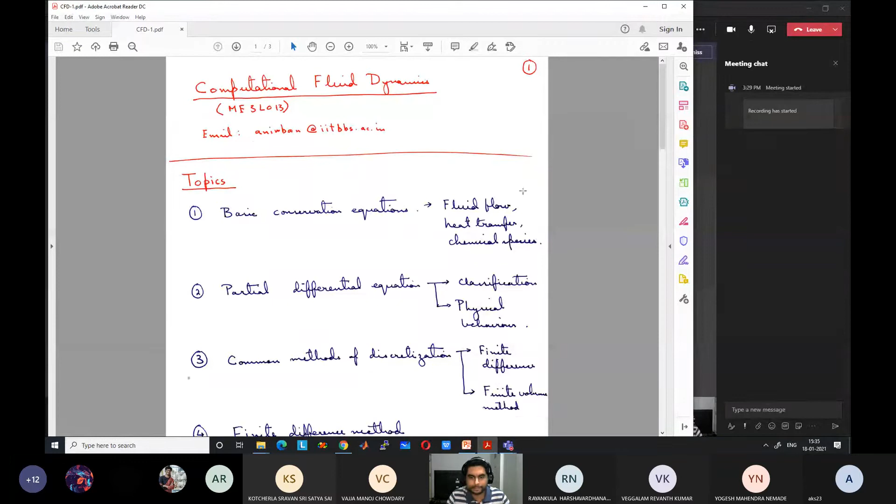So again, like our power plant engineering class, because this is a 2 hour class today, initially we will just go through the topics that we are going to cover and what are the importance of these topics. And then in the second part, after a short break, we will start discussing some of the basic things in CFD, why CFD is required, why it is important, what basically is CFD. Many of you may not be very clear about that also. What exactly is CFD, why it is required, things like that.

And from the next class onward or next to next class onward, we will dive deeper into the methods and problems and mathematics of it. Okay.

So you will see that CFD is a very important topic in your subsequent career, depending on which area. If you remain in core area, it will be a very important topic, particularly for students who are going to pursue masters, dual degree students, or those going to pursue higher studies in foreign universities. Also for students who are going to go to jobs in core areas, CFD is very important. Okay.

And CFD basically encompasses solution of thermal and flow problems using computational methods, as we will see later today. Just let me switch on. Okay. So using computational methods, how to solve thermal and fluid flow problems. And we will see that thermal and fluid flow problems are coupled together. They cannot be separated directly. The temperature influences the flow field and the flow field influences the temperature evolution. So they are solved together and together are part of CFD.

So even from job perspective, particularly for dual degree students, it is very, very important, because most of the companies in India in core areas do modeling and simulation work. They don't have the resources for doing large scale experimental work. The large scale experimental work is done in foreign countries, and the modeling and simulation work is transferred to India, and Indian organizations, or the Indian branches of the multinational companies, have very good research talent and facilities for doing CFD related work. So CFD is a very important course in that respect.

So it is good that you have selected this area, particularly if you want to go for core jobs or for higher studies. Okay. So let me first go through the topics, and then we will come into the details of CFD. What is CFD, and what is the importance of CFD?

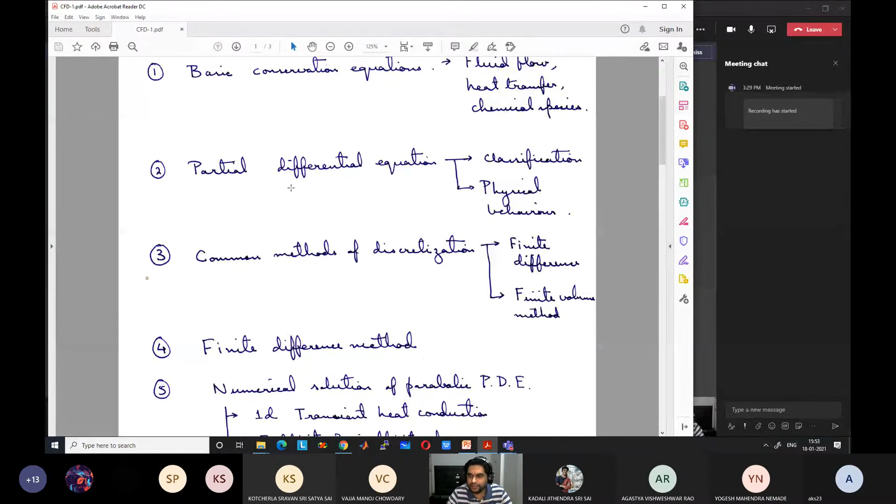So if you have a set of algebraic equations, say 100 algebraic equations and 100 unknown variables, how to solve them? With 3 equations and 3 unknown variables, you can just solve it manually. But if there are 100 equations and 100 unknowns, you need some kind of matrix inversion or some other method, and that is what we are going to learn.

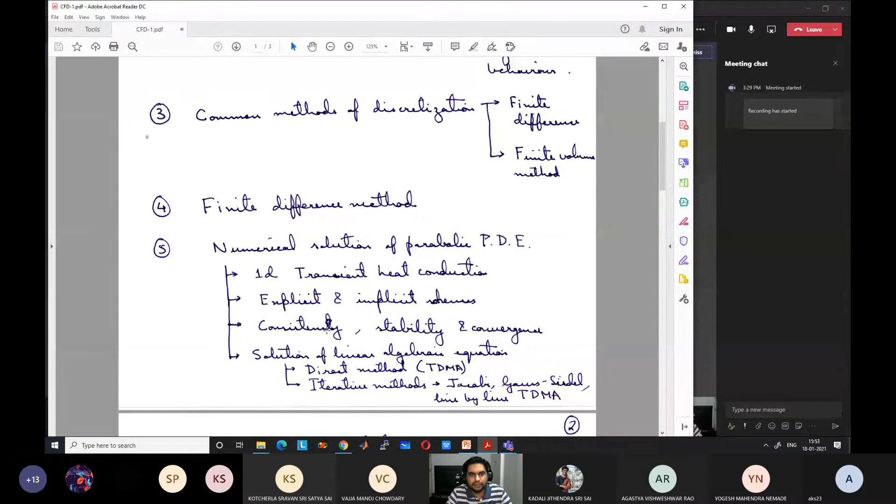There are two types of solution technique. One is known as the direct method, where you can directly solve and directly get the results. The second type is known as iterative methods, where you go through iterations, solving the problem again and again so that finally you go towards a better and better solution, closer to the correct solution. There are some advantages of iterative methods. In many cases, direct methods cannot be used, so you have to go for iterative methods. We'll study the Jacobi method, the Gauss-Seidel method, and something known as line-by-line TDMA.

The rest of the course will be on the finite volume method, which is the most important method in CFD. We will study the 1D steady diffusion problem, then how to treat source terms, then 2D and 3D problems. After learning about diffusion, meaning conduction-type problems, we will go into convection-diffusion problems: how to capture the effect of fluid flow. There are different schemes for that. We will study the most important fundamental schemes: central difference, upwind, exponential, hybrid, and power law, and their advantages and disadvantages.

And finally, we will see how to solve the flow field. Solution of the flow field is actually quite difficult. It is not as easy as solving other equations, as we will see later. I can explain briefly here why it is difficult, but it will be more clear when we study flow fields. In general, whenever you solve an equation, the number of unknowns equals the number of equations in any problem. Otherwise, you cannot solve the equations correctly, right?

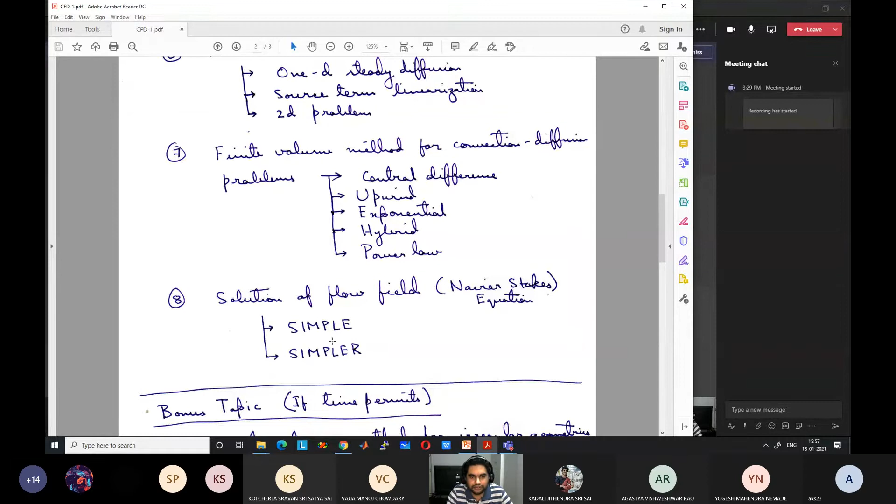Okay, so this is our syllabus. Generally, I have taken the course, this is the third time I am taking the course. I have tried to devote a few classes, 2-3 classes, on an additional topic which is not part of the curriculum, but is very important for the students who actually go into CFD solutions using some software like ANSYS, which is discretization in unstructured grids.

So for that, we would like to study what are structured and unstructured grids. Up to point 8, whatever we will discuss will be for regular grids. Regular means rectangular grid, square grid, cubical in 3D, rectangular, cuboidal in 3D. But in real life, the grid can be very haphazard. It can form multiple triangles of various shapes and sizes, which are known as unstructured grids.

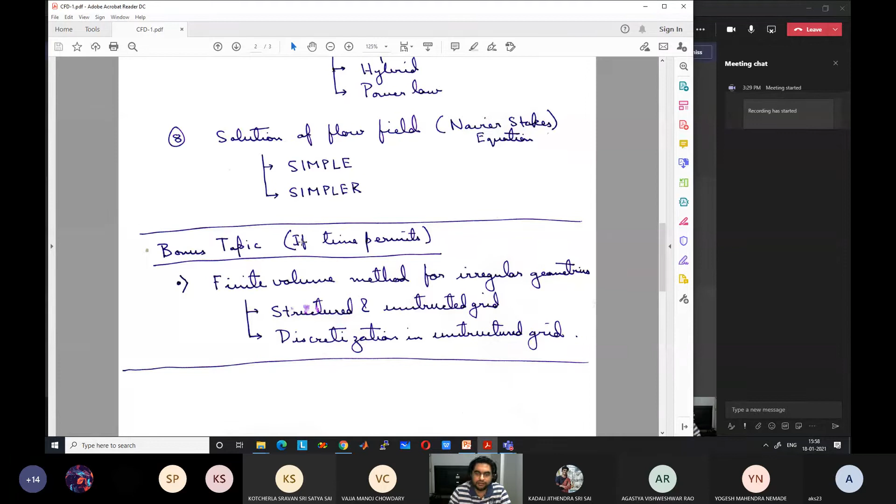So we will study the differences between structured and unstructured grids and how to discretize for unstructured grids. We will devote 2-3 classes if time permits. Not part of syllabus, but we would like to learn it because it is very important and it gives us an interesting insight into how the software programs run. Any questions up to this point?

No, sir. Where were we? Okay. Some other points.

So books for this course, I would suggest that you go with the class notes, because at least for the first part, we are not going to follow any book in a linear fashion. The notes are developed based on various resources for the first part. Once we go to the later 60% of the course, the book by Patankar, Numerical Heat Transfer and Fluid Flow, we are going to very closely follow.

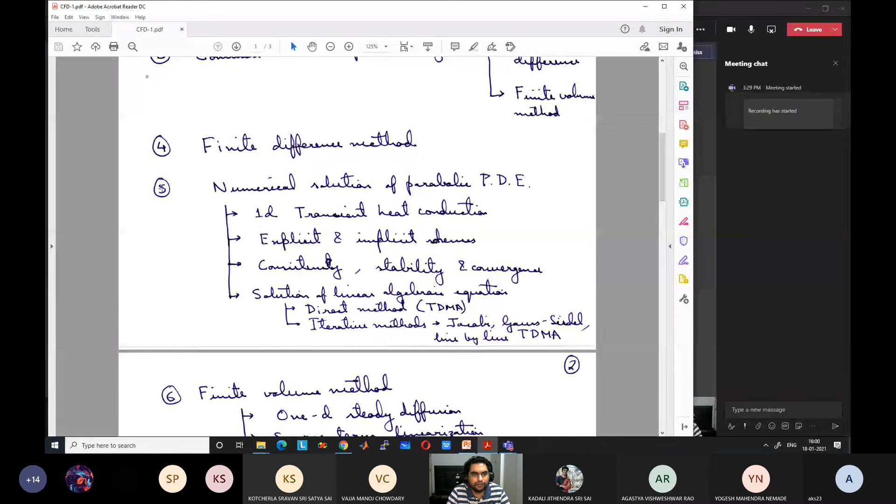Starting from point 4 or point 5, and from this point onwards, 6, 7, 8, we will very closely follow the Patankar book. Patankar actually is a very famous book. It was first written in 1980, and this scientist, his name is Suhas Patankar. He was actually a pioneer in this area.

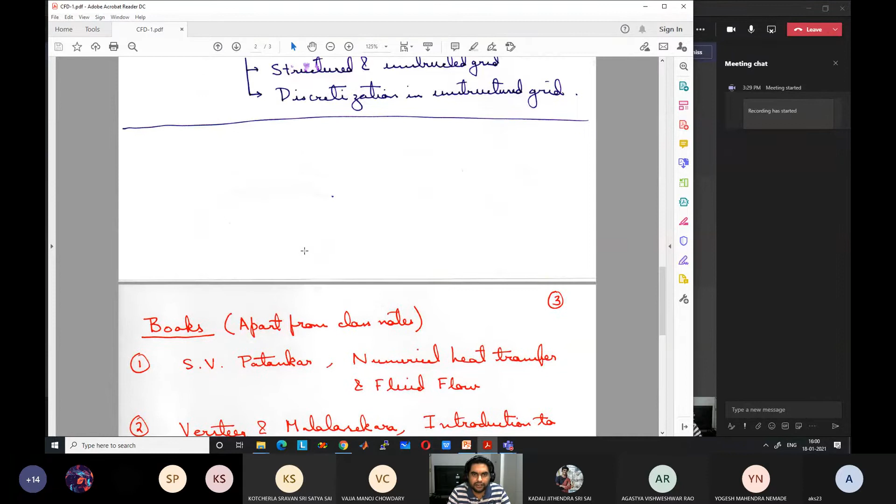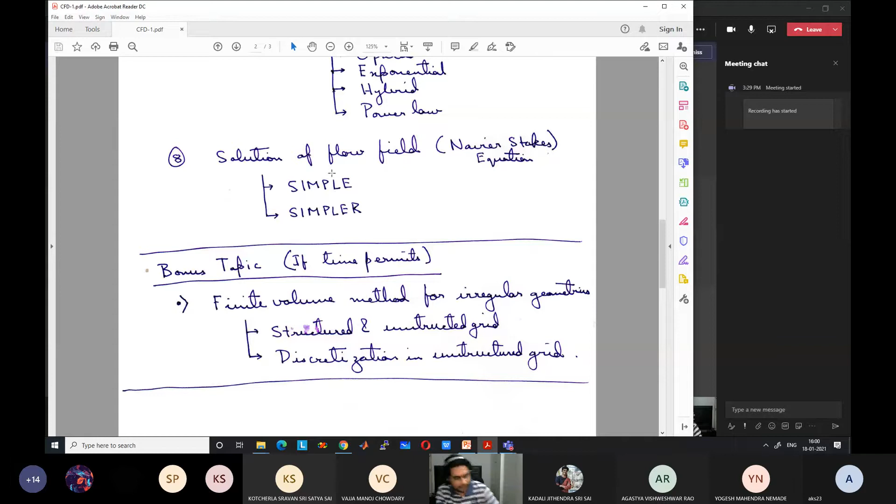He actually developed a lot of CFD algorithms during his PhD and later work in the 1970s. He along with his guide developed the solution of the flow field, the SIMPLE algorithm. All of them were invented by Suhas Patankar when he was doing his PhD in the US. So this is a very fundamental book. It is more like notes, a very short and small book, but it is quite costly. So you have to see how to get it. Otherwise, let me know.

The second book is a more recent book by Versteeg and Malalasekera, which is more exhaustive and covers more topics. For the second half of the course, you can also go through the Malalasekera book. It has more details, but all of them will not be covered in this course, since it's a very introductory course. But if you want, you can go through it. It is not very costly also.

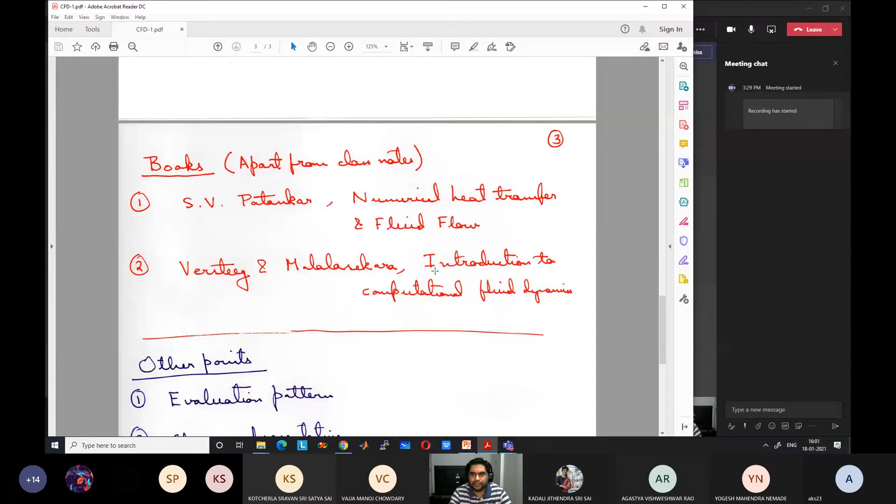So for CFD, remember that it's a very different type of course. It's not like your normal theoretical course. Although we are learning it here like a theoretical course, through lectures, CFD is not actually suited for this lecture-oriented teaching pattern. It is more like a practical course. So although we will go through a lot of theory, there are not many numerical problems that can be solved by hand or during the exam.

Some problems can be devised by me, or I can come up with some clever ideas for generating some small problems, but those are very limited. And getting good marks should not be your aim in this course. Anyway, all of my students generally get good marks, but you will not learn CFD in detail unless you solve practical problems. So for CFD, you cannot just rely on solving problems through pen and paper. You have to do some programming.

That is a very important part of this course. Without doing any programming, you cannot learn CFD properly. You will float through the course, you will get some grade, maybe even a very good grade, based on the lecture notes and theory that we study. But later on you...

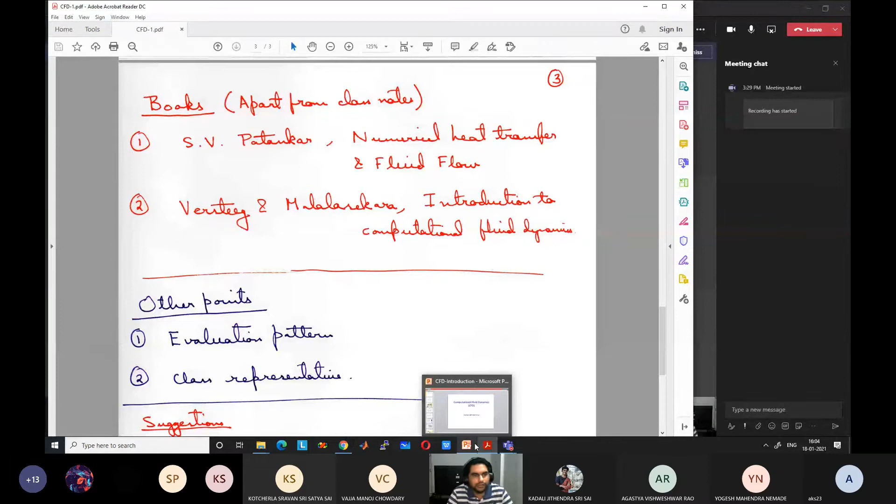Okay. So let us come to the evaluation pattern. Why I was saying this solution of practical problems is very important is that the evaluation pattern will be based on that. Instead of any class test or any pen and paper based assignment, most probably I will try to give a set or two of pen and paper based problems, which you can learn and which you can use for the exams.

But for actually learning CFD, you have to solve one or two programming assignments. So the evaluation pattern will be 80% again, which we cannot avoid. Ideally, it should have been less than 80% for a CFD course, but as the administration says, 80% will be there for midterm and final exam. For the other part, we will have 10% for assignments, maximum one or two programming assignments, which you can solve using MATLAB or any other tool.

MATLAB is easy to learn. If you want to use Fortran or C, that also is fine. But I would prefer MATLAB, and you can learn MATLAB because it is very useful for you guys. MATLAB license also is there. You can officially get the license as per the instruction given by the CITSC department. And Fortran and C compilers, of course, are freely available. So programming will be required.

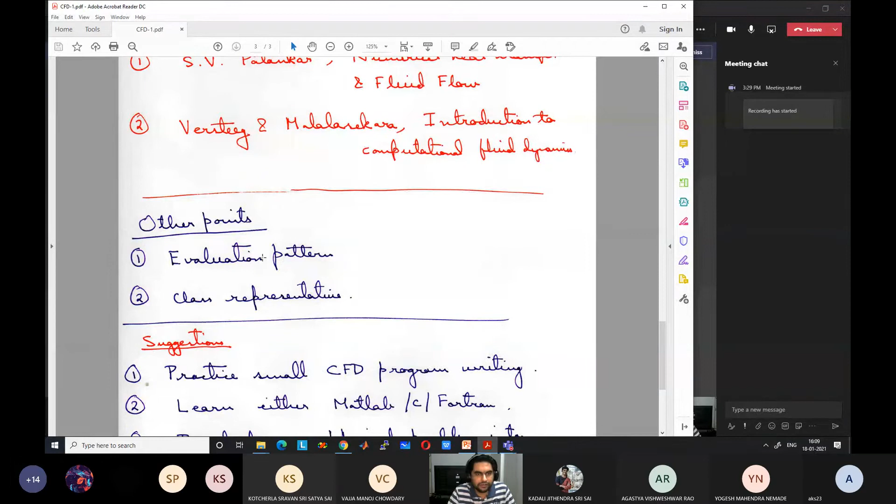So before we start our discussion on CFD, again some small suggestions. We have already discussed, practice some small CFD program writing. So I will be giving you a couple of assignments, but apart from that, time to time I will tell you that this also can be solved by writing a program. If you want, you can write that program. Those are optional. I am not going to check them. You don't have to submit them, but if you do those, you will be able to learn CFD in a better way. So I may say that we can write a program to see this solution. And if you are not familiar with any programming language, please learn one of the programming languages.

You can use Python also, but I would prefer that you learn MATLAB, because MATLAB is strongly used in industries and in academia. So whatever is the career path that you choose in future, MATLAB will be very helpful for you. The only thing is that in some industries, MATLAB is slightly less used because it is very costly for industrial people. So they may be using Fortran and C, and Fortran and C are very much useful for large scale problems like high performance computing, like parallel programming, because they are much faster than MATLAB.

Okay, but for normal engineering applications, for small problems, MATLAB is very suitable. So I would suggest you learn any of them, but preferably MATLAB. But you can submit the assignment in Fortran or C also, and I am very familiar with Fortran, slightly less familiar with C, and very familiar with MATLAB.

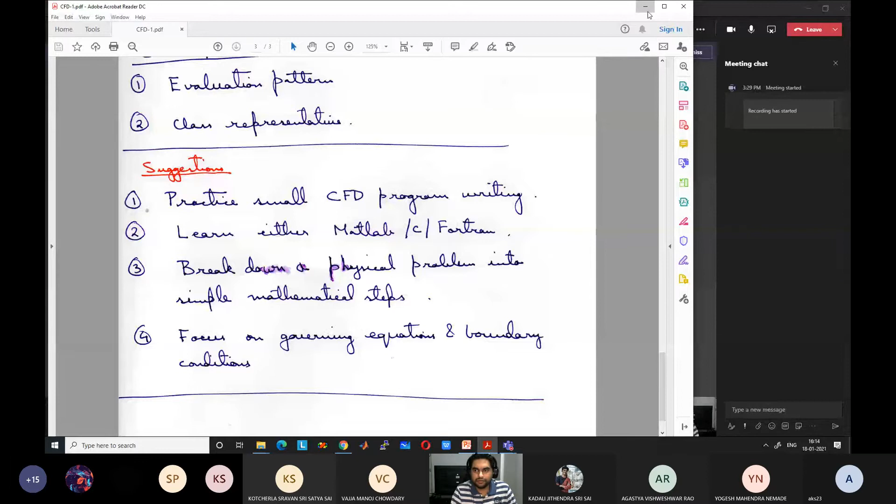So I am going to take a short break at this point, and then we will start our basic discussion of CFD. First, we will go through a few slides, and from the next class onward, or next to next class onward, we will actually jump into the mathematics of CFD, and we will go through class notes. If I need to explain something, I will also use a tablet and draw something on your screen. But mostly we will go through class notes.

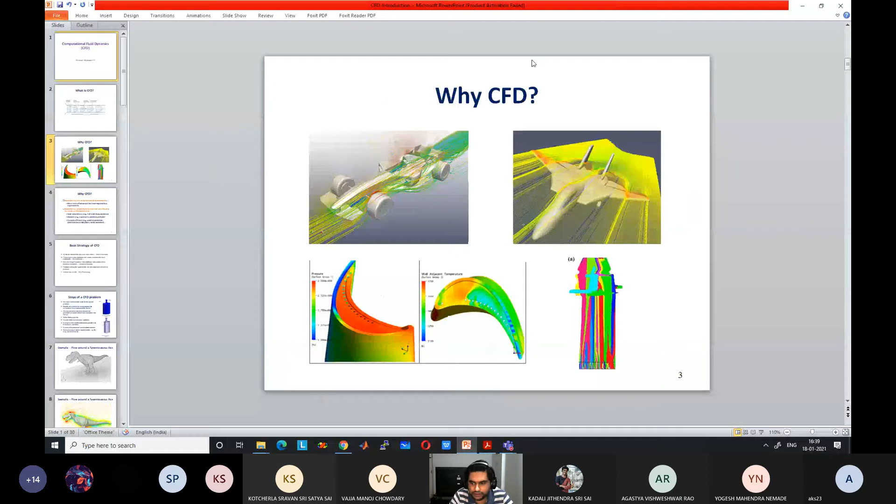Okay, so we have learned about what is CFD, and we have also discussed briefly what is its advantage and disadvantage. Advantage is that wherever analytical solution is not possible, we can use CFD. And another advantage is that compared to experiments, cost is relatively less. Much less is not the correct one. CFD solution can also be very costly because you need computational resources, and computational time is costly. But it is less costly as compared to experiments, particularly for cases where you need to study the variation of multiple parameters.

Say I was saying 5 different lengths and 5 different diameters of the cylinder. For CFD, it is not a very difficult problem. You can just vary the length and diameter of the geometry, run the simulations and get the result. You won't have to make 25 different pipes or tubes. So that is an advantage as compared to experiments. And as compared to analytical solution, the main advantage is that you can solve for many complex situations, like shown here, which are not possible using analytical method.

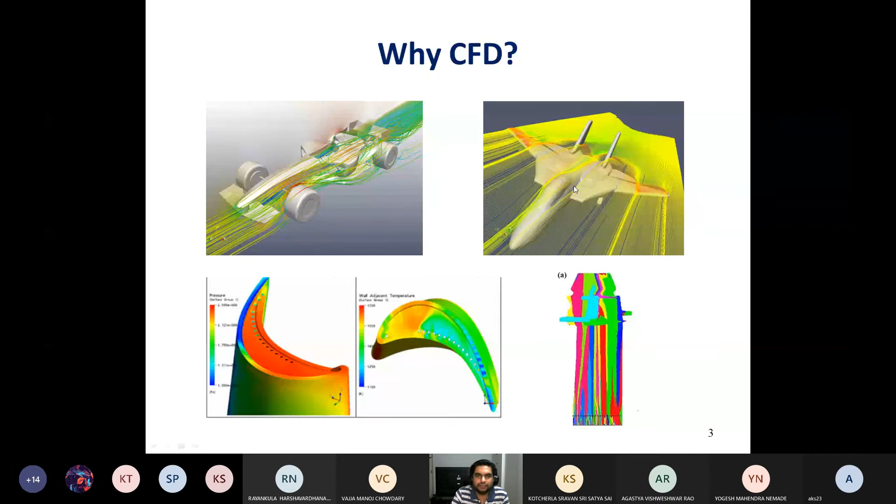So as I have already explained, this is outlined here. Why is CFD used? We have already discussed this, but let me just summarize it again. If you use simulation instead of experiments, it is more cost effective and less time is required as compared to experiments. Experiments are more costly and more time consuming.

So you can use less time and less expense to get similar results. And analytical solution is not possible in many cases, so you can use simulations in those cases. CFD solving is known as simulation. When you use a CFD algorithm and solve, it is known as a simulation. You are simulating the real life scenario, meaning you are replicating it.

Then cost is not the only reason. Time and cost both, like monetary cost, as well as time, which is also one sort of cost, one sort of expense. So if you can reduce the time, you can reduce the cost. But this is not the only reason. There can be many situations in which analytical solution is not possible because the situation is very complex, and experimental solution is also not possible.

For example, say the scale of the simulation is very different from our lab scale, so this scale cannot be captured at the lab scale. For example, you want to solve for aircraft, like I was explaining, or large ships like an aircraft carrier. You want to design the hydrodynamics around an aircraft carrier. What will be the drag around it? These are very large scale structures and you cannot develop a prototype. So you have to develop a scale prototype and it will not be able to accurately capture the dynamics of the flow around the large scale structure.

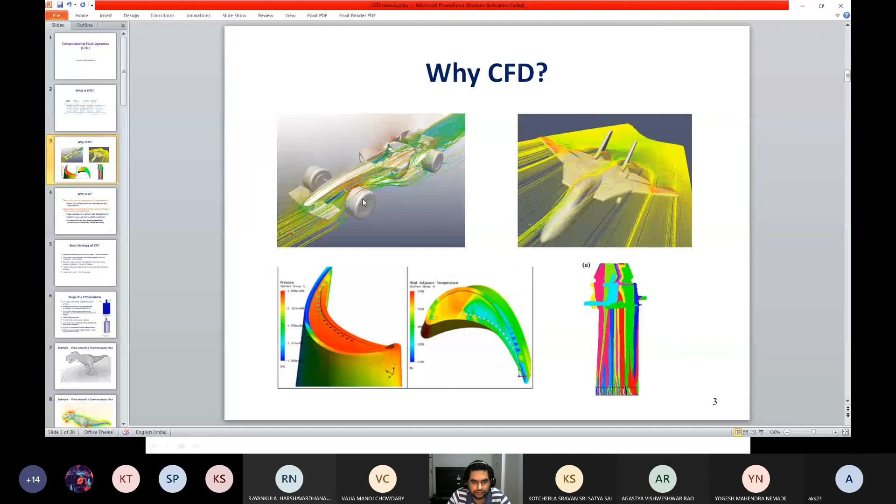Then how the stars evolve with time. At those length scales, again, you obviously cannot perform experiments, but you can use CFD to study how stars evolve with time, stellar evolution. I am just giving you some examples; there are hundreds of others. These are examples interesting to me, where experiments or analytical solutions are not possible because the situation is so complex, or the scale is so large, or it is hazardous, that you have to go for a CFD solution.

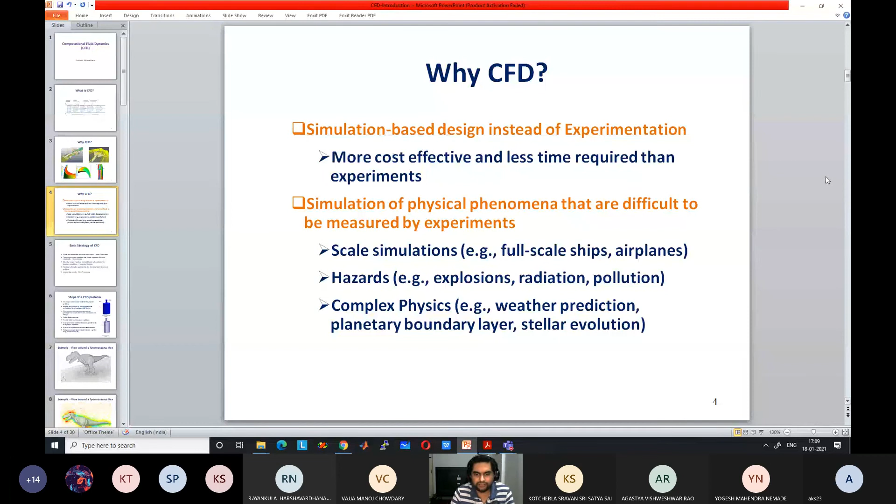Is it clear? I hope it gives you a clear picture of how important CFD is in normal engineering applications and other complex research areas. I have not shown all the areas here; I will show them in the next class. If you are a biologist, or a mechanical engineer, nowadays a lot of mechanical engineers work in biological areas because mechanics and biology have combined as biomechanics, or bioheat transfer. If you are a materials expert, again, there are a lot of interdisciplinary areas in mechanical engineering and materials.

Then if you are a physicist, mechanical engineering obviously is part of physics. So if you are a physicist, if you are a thermodynamics person, heat transfer person, if you are a researcher working on flow pattern, any area, if you are an astrophysicist, geologist, marine biologist, all of them require CFD. If you are working in the medicinal area, we have published papers even in cancer research in recent years based on CFD modeling. So all these require CFD modeling.

How much time is left today? Still some time is there. So we will start going through some more aspects of CFD, and then we will continue this discussion in the next class.

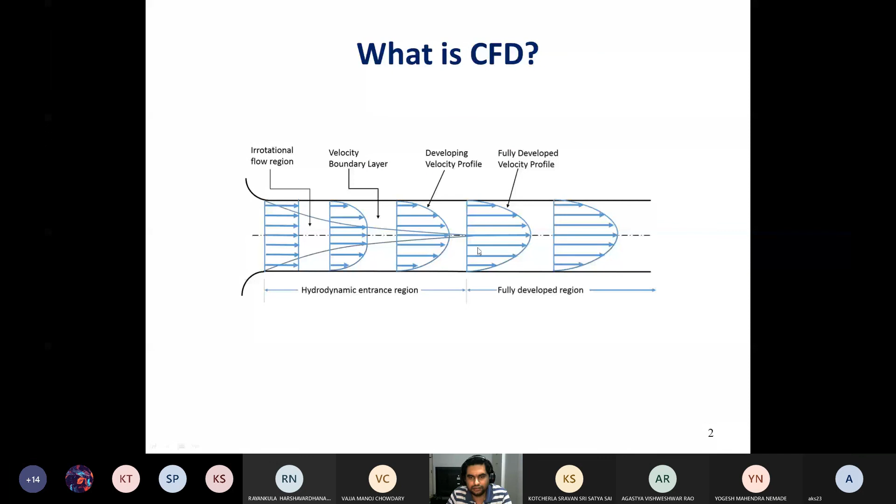Okay, so this is known as post processing, and also analyzing the results. So how to plot these results based on the discrete points, and then we want to analyze the result. Analyze means, say you will get velocity, temperature, then how to get the heat flux. Heat flux is minus k dT/dx. Just based on the temperature and x values, I can calculate the heat flux. So we don't need to solve again the CFD problem. Just based on the temperature that we have obtained, we can find the heat flux at any point.

Similarly, shear stress. So you know what is shear stress? It is mu del u del y, in a 2D problem. So if I know the velocity u and its variation with y, I can find out the shear stress just by calculating after the CFD solution. This is known as post processing. If you want to calculate the drag coefficient, lift coefficient, Nusselt number, these are all part of post processing.

So like this, we have to solve it. So these are the basic steps. You discretize the domain into a set of subsections which are known as control volumes. The process is known as meshing or discretization. Then you devise the governing equations for that domain. Then for each subdomain, you devise simple equations based on the overall governing equation.

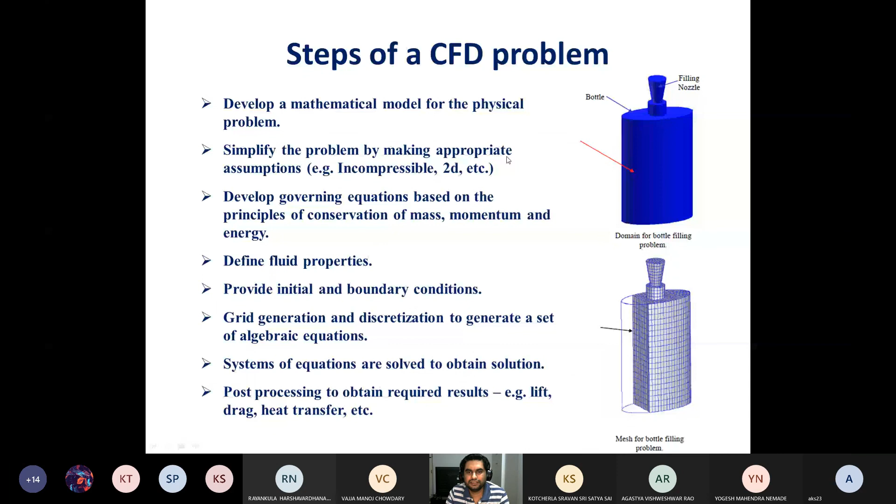We will continue our discussion in the next class again through another example. Say if I want to study the drag coefficient for a Tyrannosaurus rex, how aerodynamic its body structure is. So how to do that CFD study, and even for this bottle filling problem also we will revise once again what are the steps, and we will go through some interesting things, and then we will go through some of

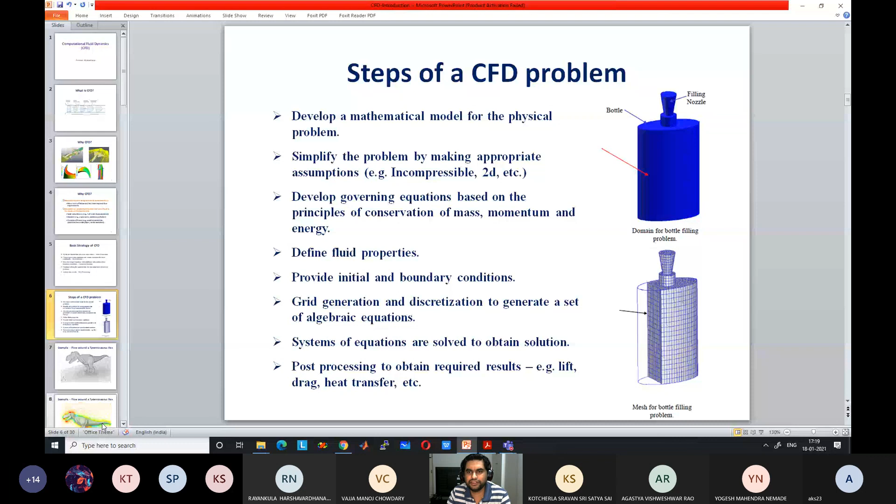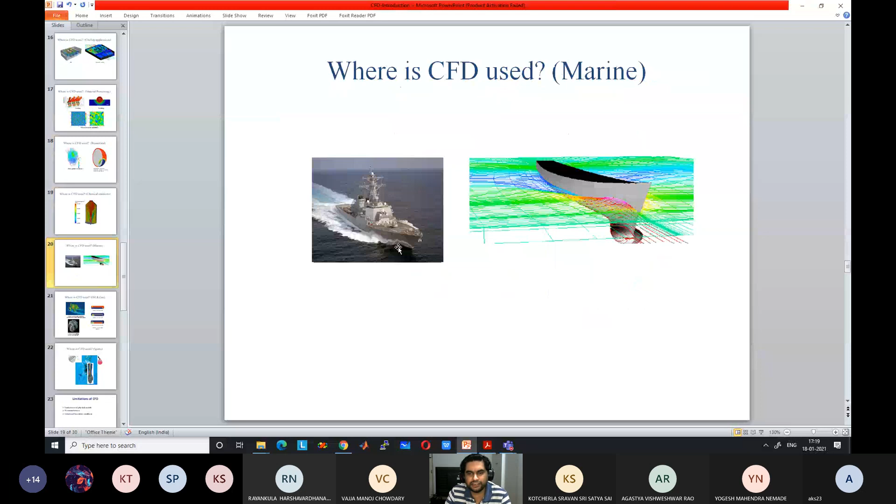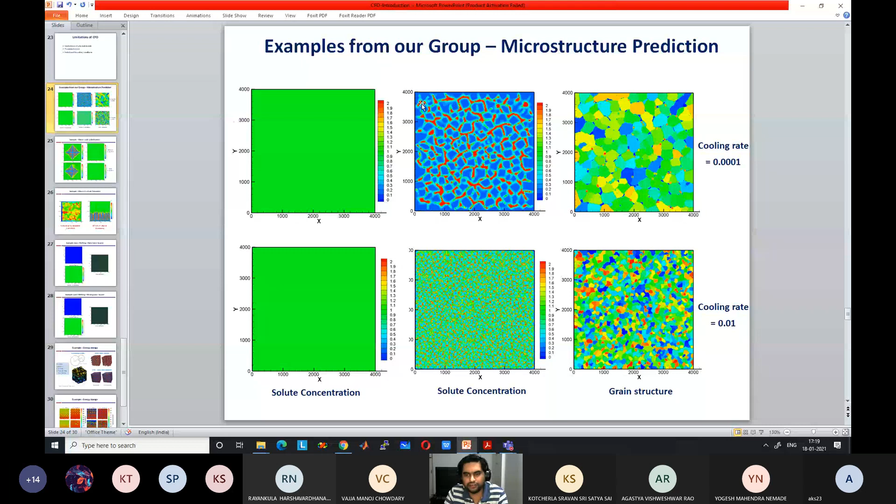the applications of CFD in some more detail: aerospace, automobile, power generation, cooling, material processing, biomedical, chemical reaction, marine, oil and gas, sports. A lot of applications, limitations, and I will show some results from our group to give you a feel that we can also do similar type of problems, even in our lab. Similarly, other professors are also working, Dr. Venugopal, Dr. Bhumkar, Dr. Shashidhar, Dr. Rath, on similar type of results.